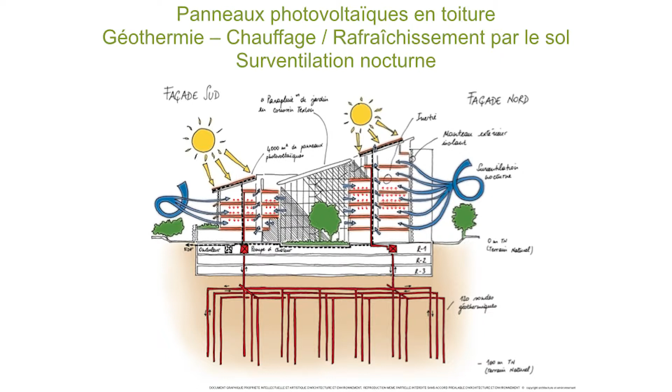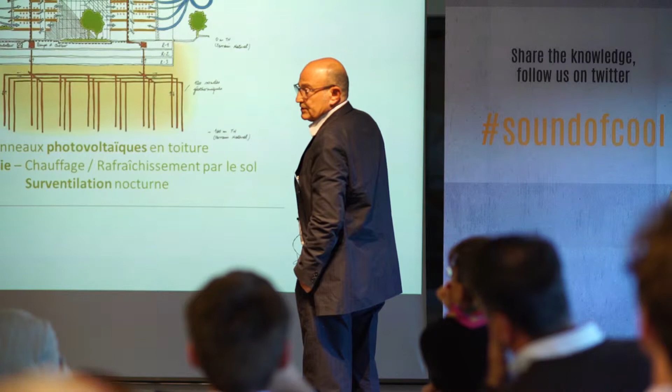How does it work? In this first picture you see the shape of the building. The south is there, north over there, and the atrium is there. We have 120 pipes that go down into the ground, 100 meters deep. With that we have a pump, and we also have tabs in the floor.

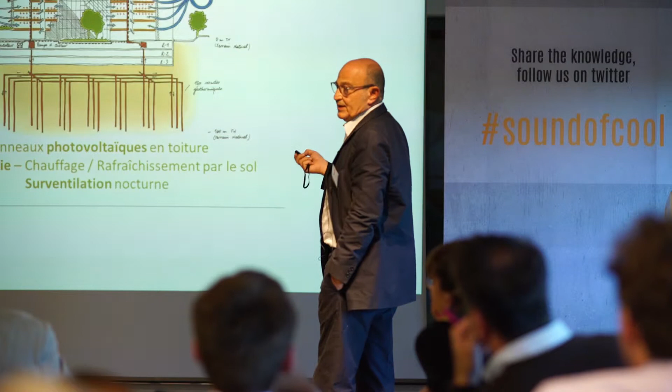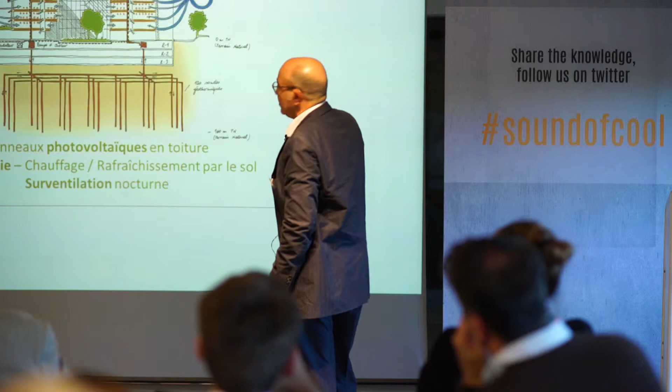At first we had a very big night ventilation system, because we need something to extract smoke if the building is burning — but as everybody knows, a building never burns. It costs a lot of money to install, so we thought maybe we could use the smoke extraction system and bring in air through the windows for night ventilation as well.

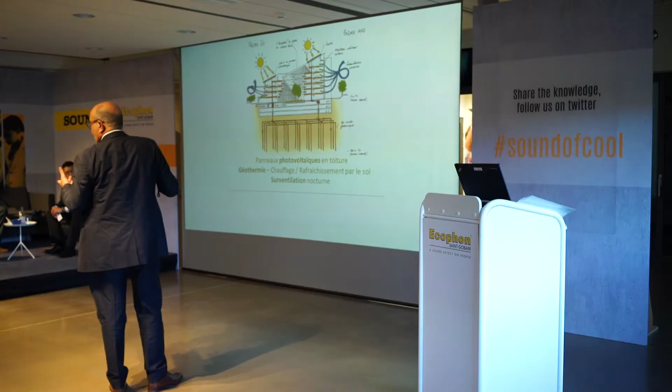But we were not able to do so because of the humidity of the air, and there were concerns because we're close to a forest, so they said it might not be useful. So we stopped the night ventilation plan. When the tabs are in cooling mode, they can also run cold water through them to remove the heat from the tabs.

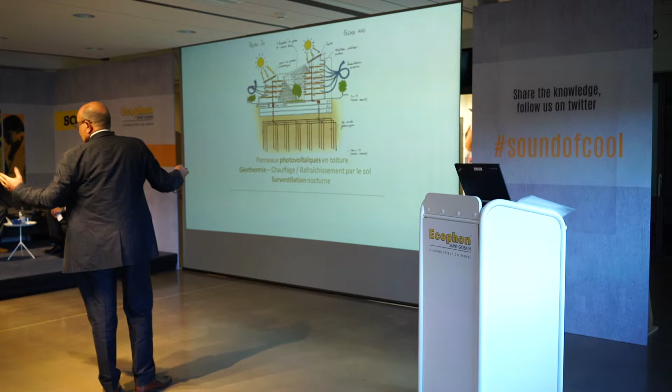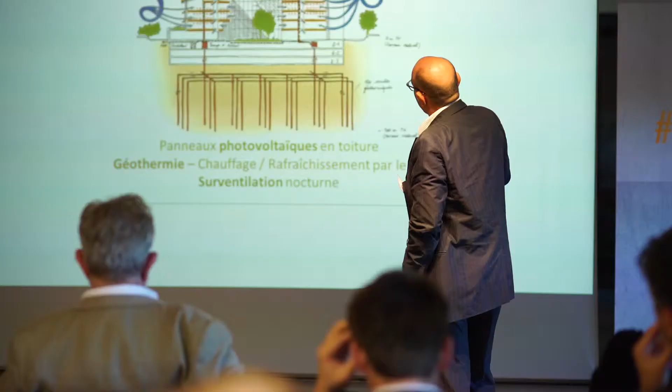We have a very specific space, the atrium, which acts only as an umbrella for the sun — we have serigraphy on it — and for the rain, but it's still open. Downstairs we have a garden there, so users can use that space. It's not a closed atrium, it's not a garden either, it's a special place.

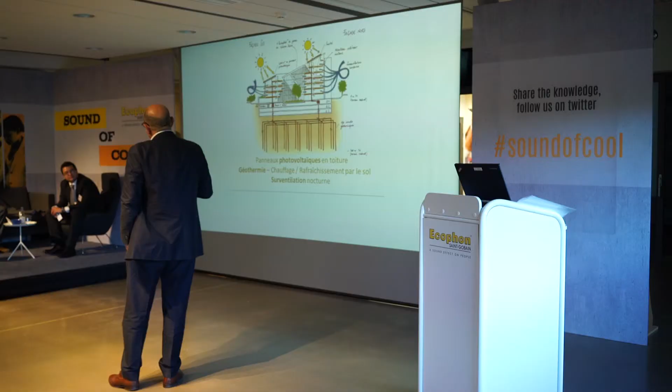When we were discussing all these techniques, we realized that's not the most important thing in a building. The most important thing is the user. They're not very interested in what happens on the ceiling, the HVAC, and so on. We tried to make many special spaces so we wouldn't talk about 'working places' in the building, but about users — who are able to work in many, many places throughout the building.

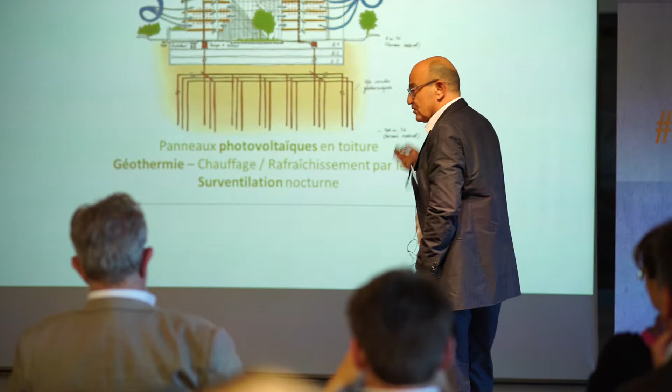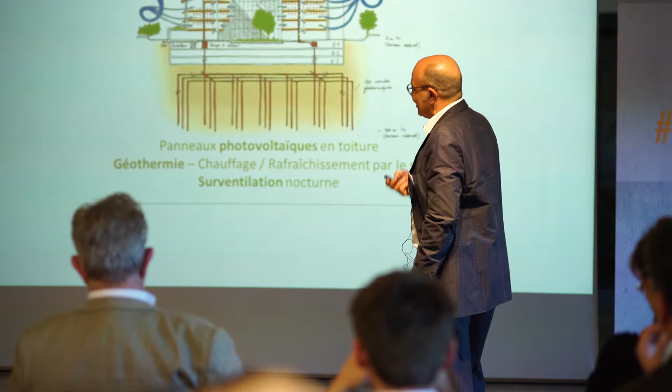So we tried to make many places where they are able to work. That's the difference — sometimes people ask how many working places there are, but we don't speak about that. I insist, we speak only of users. Someone can work on a sofa, another can work in the garden, and so on.

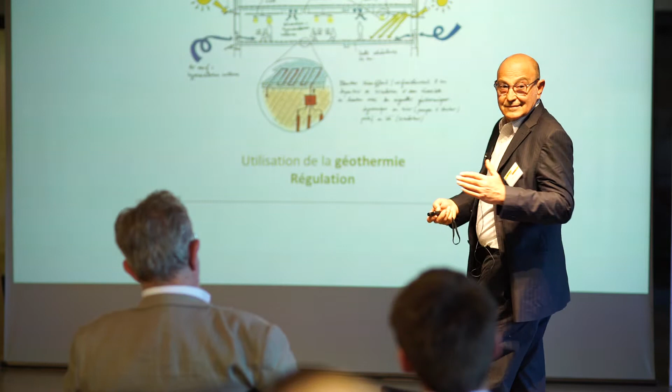The building is more or less 19 meters deep, so we tried to make two lines of structure so that we'd be able to have a dalle pleine, a solid concrete slab.

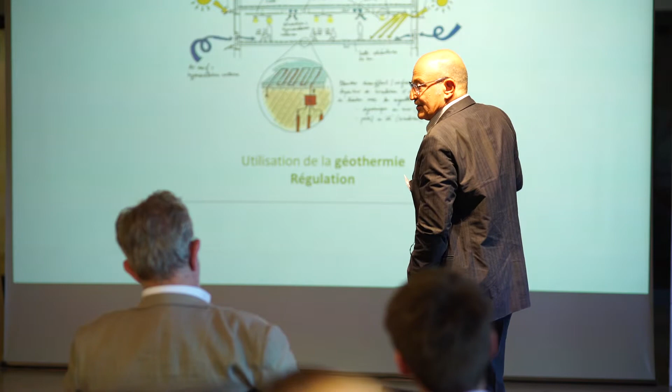But the owner didn't want that, so we only have one line there. So we have to use dalle alvéolaire, and we are obliged to put all the pipes over the floor. I would prefer to have that under the floor, but we have it on the floor in this building.

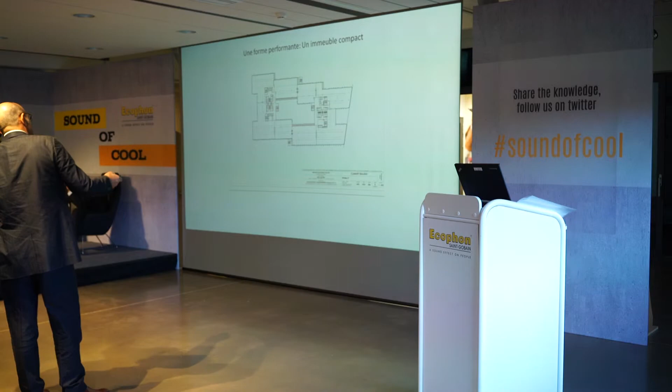This is the first tranche du bâtiment, the other one will be there. So we have 19 meters depth, the street which is over there down on the first floor, and then one building, another one. There are two buildings on that side.

So this was the first design for inside the building, and we also have each column at 8 and 10 meters, and we also have an allège on that place.

So that they have a panoramic view. Because sometimes you see an office building with a window going up to the floor, and maybe it's nice for the facade design, maybe it's nice for some users because they can see downstairs, but thermally and for the light in the building, it's of no use.

So when we were in Clamart, close to Paris, we also had a problem of cost and money, because the price for the square meters each year is 270 francs, it's euros.

So we have to control the cost of the building. We are not able to do everything, we have to do what is very useful for the building, but we don't have money to waste, so we make those kinds of choices.

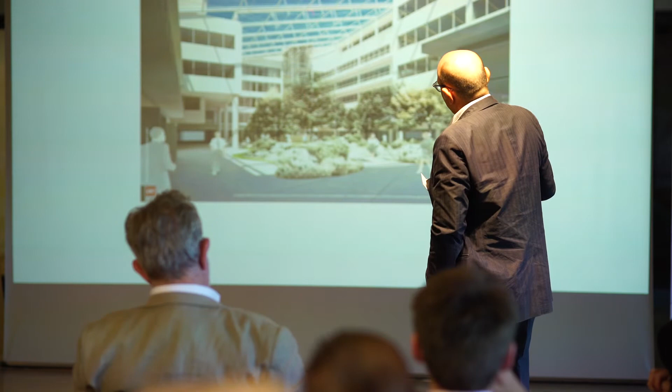And what we also built are those stairs which are there. All those stairs are not useful for security, but the use of those stairs is so that people, when they are working on the first, second or third floor, they don't take the elevator.

They are climbing up, walking, and when they want to go from the 6th floor to the 3rd floor, they also take these stairs.

And sometimes, actually, when you are walking through the building, you can see people sitting down on the steps with their iPhone. Well, they use the stairs as a space, not only as a stair.

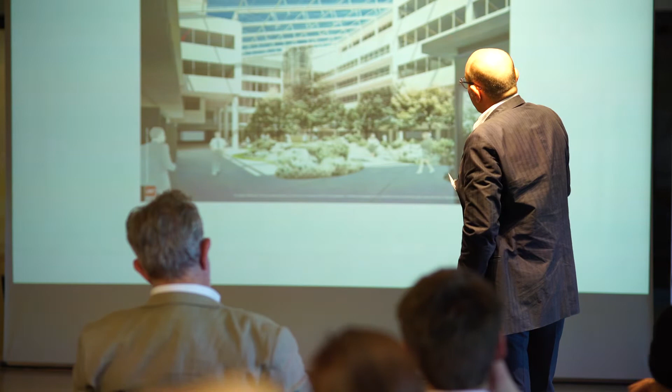We also have coursives, which are like balconies that are there. It's also for circulation, so that people have other space, and it's also for the acoustics in this area.

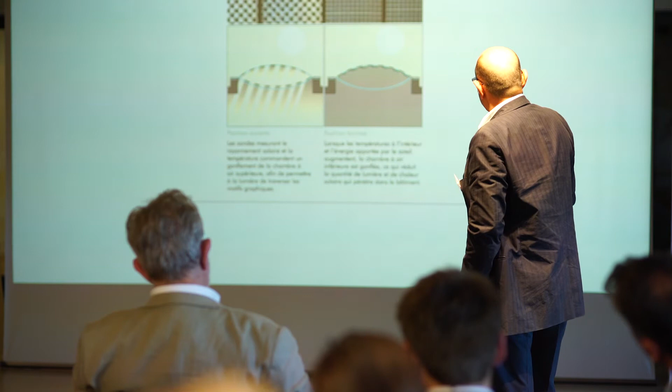So that's things for the ETFE, the way it works. Some design of the gardens.

All those things are for the GTB, which is the technical management of the building. Because when we have this kind of building, you also have to make this building work afterwards, and it's very complicated. Actually, it's not working very cleverly yet, but I hope that in 2 or 3 months they will be able to.

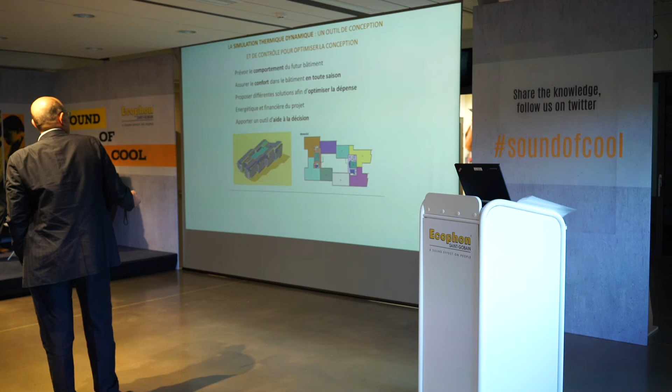Let's see. Here you can see the street. We also already saw that.

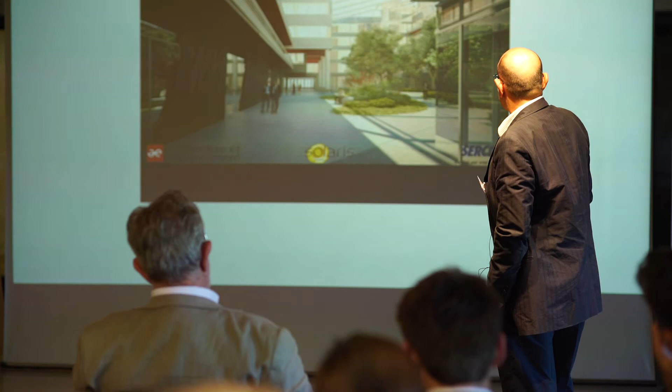This is one of the main entrances of the building. Can go back to this view.

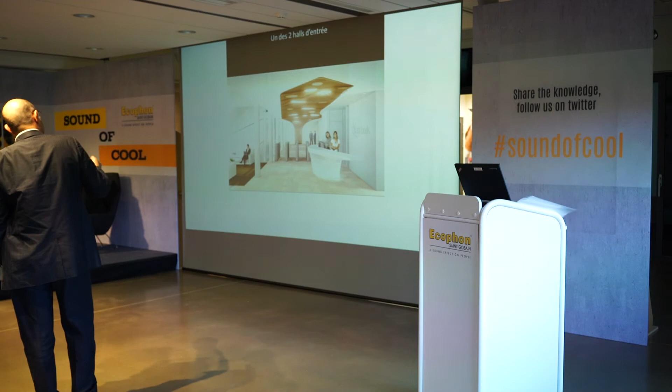When we have tabs, we also have to make special ceilings. This one is built in wood, so that the air can go through. So we try to have...